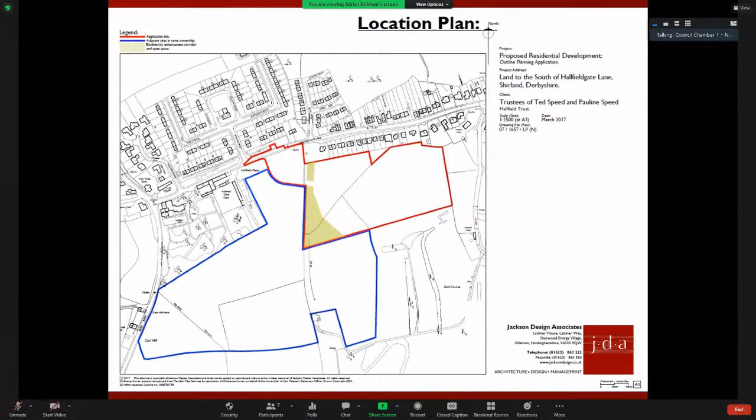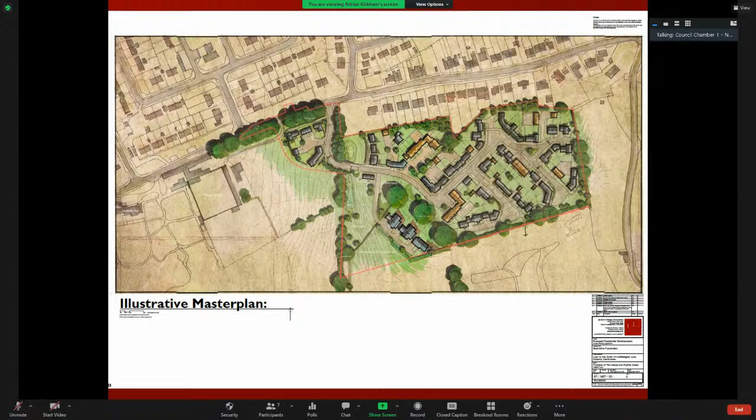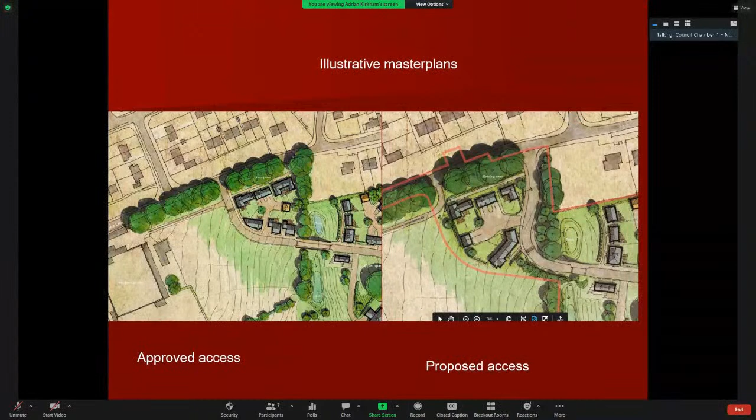This is the red line application site boundary. The conservation area is to the west around Hallfield Gate Farm. This is a submitted illustrative master plan showing the position of the new access running along the western boundary of 43 Hallfieldgate Lane. This is an extract of the illustrative master plan submitted for the extant scheme and the proposed access, showing how the layout of the houses might be located.

This shows the location of the proposed new access along with the visibility splays and its position next to the end tree. These trees are subject to a tree preservation order, and whilst this tree is to be retained, the works are likely to impact it. However, as set out in the report, this is considered a better solution than the extant site access.

To the east, a new footpath is proposed to join up to the existing path on the southern side of Hallfieldgate Lane.

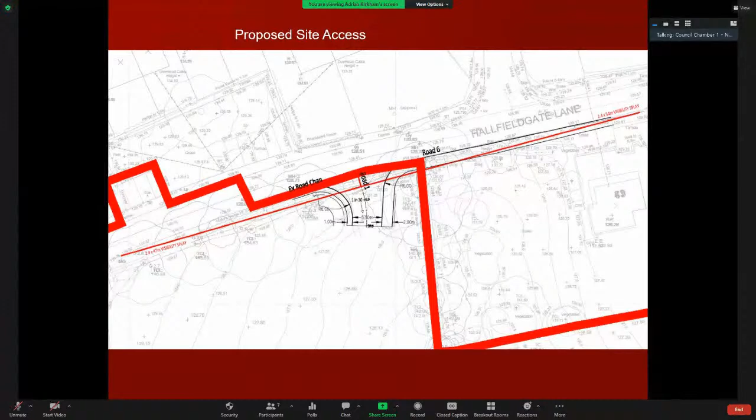This shows the approved site access between two TPO trees. This is the point of the existing access to Hallfield Gate Farm, and as set out in the report, the existing access has caused damage to the two trees either side, and the works to form the approved access would cause further damage to the trees.

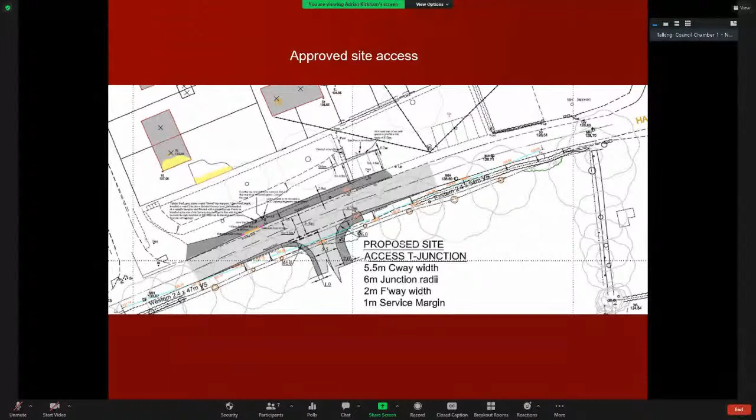This is an illustrative plan showing the cross sections of the internal road. This plan and the following sections show how the access road might be achieved. The red line on the eastern edge of the access road is a proposed retaining wall.

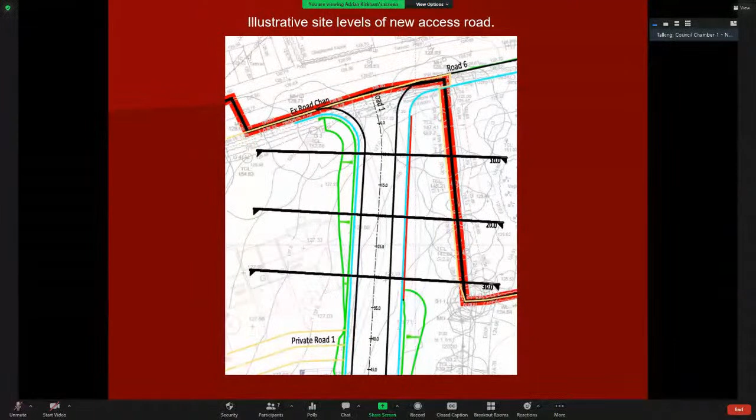This shows the illustrative cross sections. The top one is 10 metres from the site access and the bottom 30 metres. These are illustrative and the final details would form part of the reserved matters.

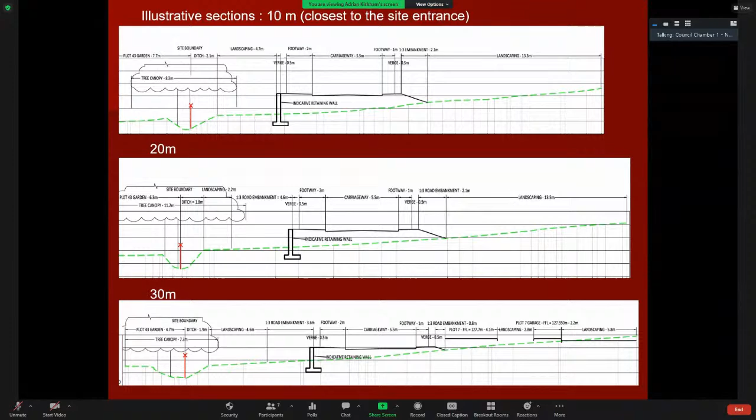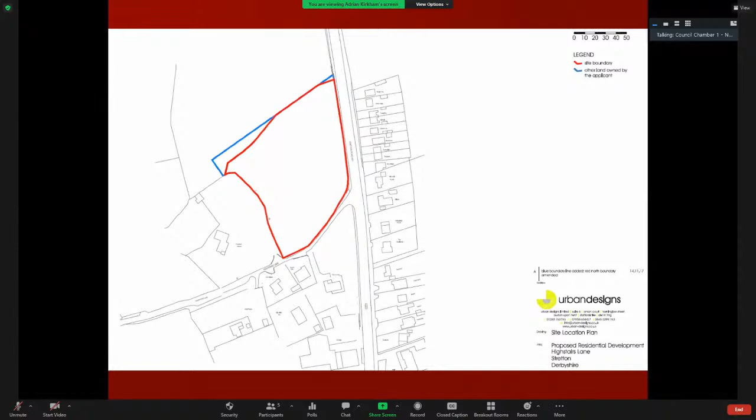So this slide offers a visual comparison between previously—so if you can make out, you've got a comparison of—so if we move forward one slide—so this, no, that's fine. Thank you, so this slide, apologies about that.

Yeah, it must be me—hopefully you can see from the plan up there, though you might not be able to see it from there, Councillor Cooper. But yes, you're right, the garage for plot 6 is right on that line. The advice David gave me is that's the root protection area, and the garage won't go into that area. I think David was advising it's a guide to create the maximum protection for those trees—the garage won't go into that RPA, and we're taking the view that's acceptable. As officers we're also taking measures above and beyond what was previously approved, removing permitted development rights for those properties on that boundary to prevent hard standing, extensions, outbuildings, which we think will give greater protection.

Any other questions? No, thank you. Shall I open the floor for debate? We all understand how to put a motion in if there's no debate.

No debate—I'll put a motion on the table to go with officers' recommendations. Second that, Chair. Okay, we'll go with a vote.

Councillor Armitage. Councillor Cooper. Councillor Elliott, abstain. Councillor Foster, for. Councillor Hancock, for. Councillor Hartshorn, for. Councillor Liggett, abstain. Councillor Jones—excuse me—Councillor Powell. Councillor Rouse, for. And Councillor Roth, for. The motion has passed, Chair.

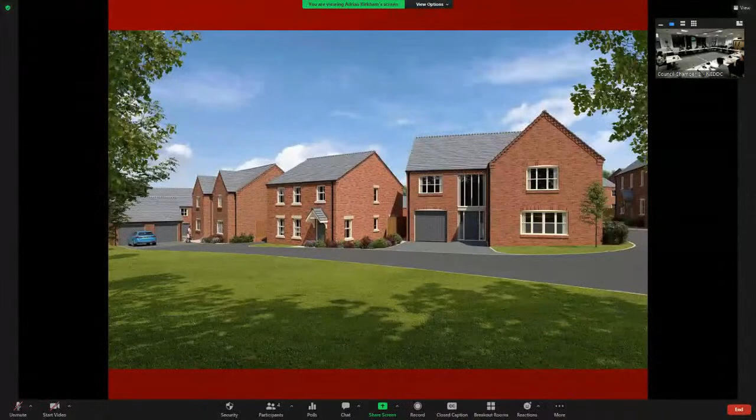This is the second of the applications at Highstairs Lane. This is a section 73 application to vary condition 1, the approved plans of planning approval 17768 RM, to vary the scale and appearance details. The main issues are whether the changes to scale and appearance are acceptable on the site, the surrounding area, residents' privacy and amenity, and the trees to the west of the site.

This is the same slide as before, illustrating the extent of the site in orange and showing the relationship with the surrounding area.

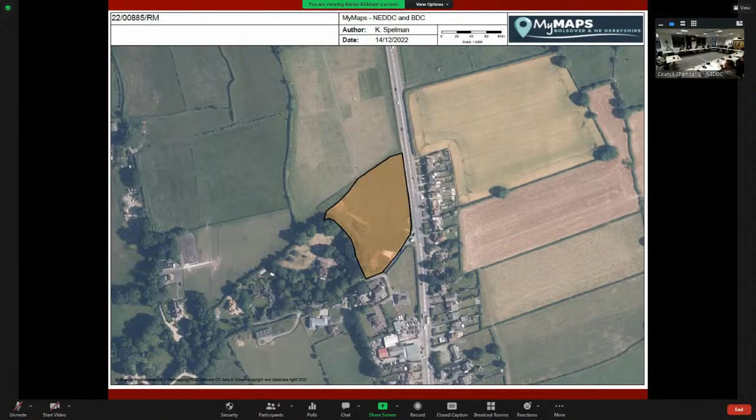This and the next couple of slides have been submitted by the developer and offer an illustrative view of how the development may appear once constructed.

I'll show you a selection of the house types compared to those previously granted. This house type is the Durham, to be used on plots 4 and 5. Materials to be used on this and the scheme in general are red brick to complement the surrounding street scene. The next slide shows the previously approved house type for plots 4 and 5.

This house type is the Barnard and will be constructed on plots 22 to 24. This will be a prominent house type as a terrace when viewed from the A61, in comparison to the previously approved scheme house type in those plots.

This house type, the Waterford, is used at the site entrance on plot 25. In comparison, this is the previously approved house type in that location.

Finally, this is the Bamborough, and it'll be constructed on plot 7, close to the boundary with Prospect House. You'll note the 2 upper floor windows on the side elevation in that top right hand corner. They'll face towards Prospect House, but these can be conditioned to be obscurely glazed and have only high level opening. In comparison, again, to the previously approved house type on plot 7, that only had 1 window in the upper floor.

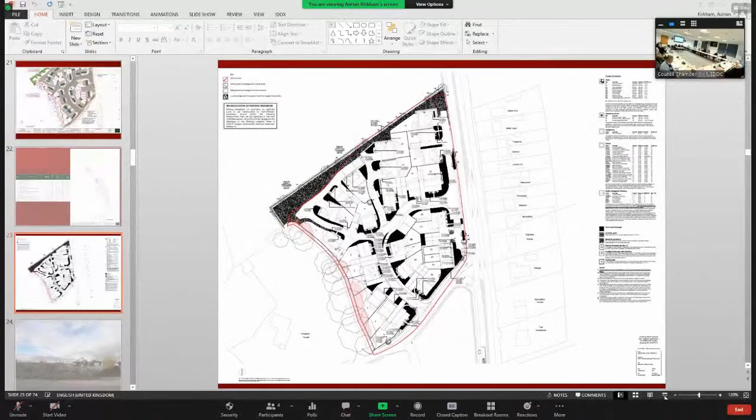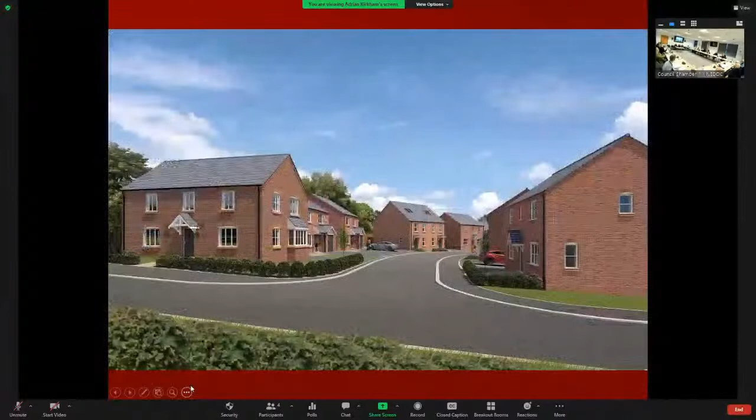So this is the two-story property that is proposed, which has got accommodation over 3 levels. This is the Durham, so this is plots 4, 5, 27, 28, 20 and 21 within the scheme - 6 units. Compared to the previously approved house type, that's what that looked like. So we just flip between - very similar in appearance. On the proposed scheme, the eaves are slightly lower. I think that helps just bring that height down a little bit.

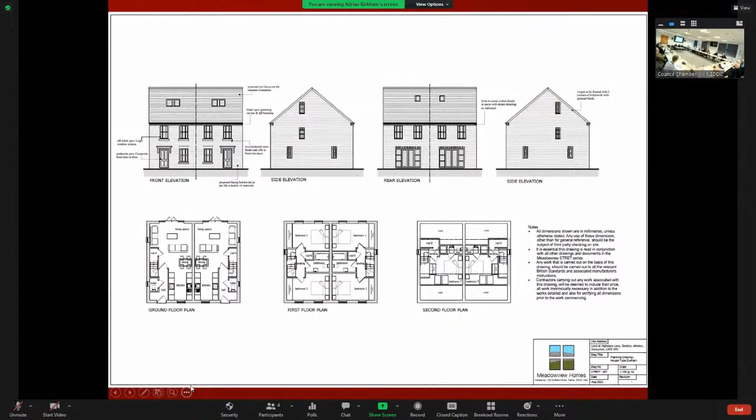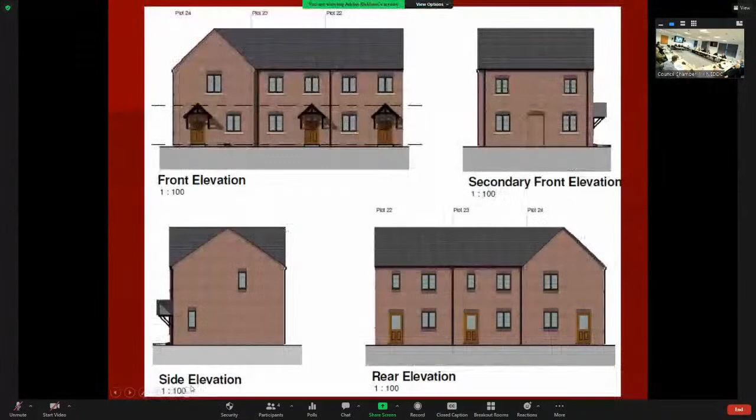So if we move on to the next house type - do you want me to go through all of these? Yeah. So this is the row of terrace, plots 22 to 24. It sits on the corner of Highstairs, so it's very, very prominent in the scheme. This is what's proposed compared to what was previously approved on the next slide. So it could be argued that the proposed house type has actually got a little bit more character to it.

And then the next house type - I think this is one at the site entrance, plot 25. So this will front right onto the entrance and have a side on to Highstairs Lane. In comparison to the previously approved house type, it's not vastly different. So if we move to the next house type.

This one's plot 7. This is the one that has quite a close interaction with the boundary on the west. In comparison to the previous approved house type - yes, I think we might get widths and lengths a bit of cross-reference here. It is a little bit longer, so as you view from Prospect House, it is a little bit wider. I've worked out that the massing on that boundary is probably only about 10% difference. Hopefully that helps, Councillor Hancock.

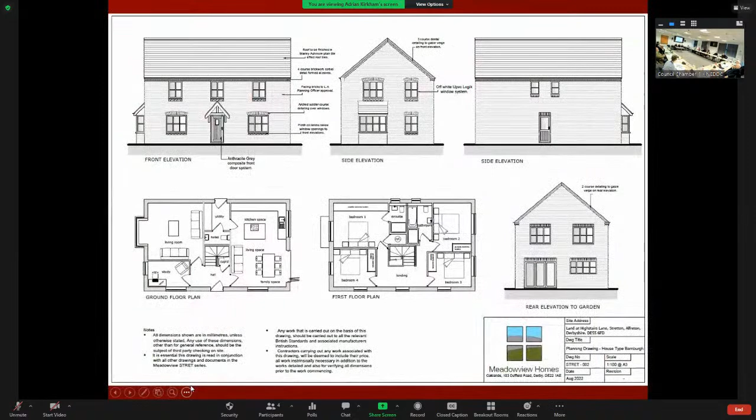Is that okay? Okay. Any other questions? Any other opening for debate? No, I'll move it for a motion then - that we go for officers' recommendations. Thank you. Second that, Chair. Thank you.

Off we go for roll call. Thank you, Chair. Councillor Armitage. Councillor Cooper. Councillor Elliott. Councillor Foster: For. Councillor Hancock: Against. Councillor Hartshorn: For. Councillor Liggett: Abstain. Councillor Jones: Abstain. Councillor Powell. Councillor Rouse: For. And Councillor Rough: For.

So I make it 5 for the motion, 3 against and 3 abstained. The motion has passed, Chair. Thank you. Okay, thank you all very much.

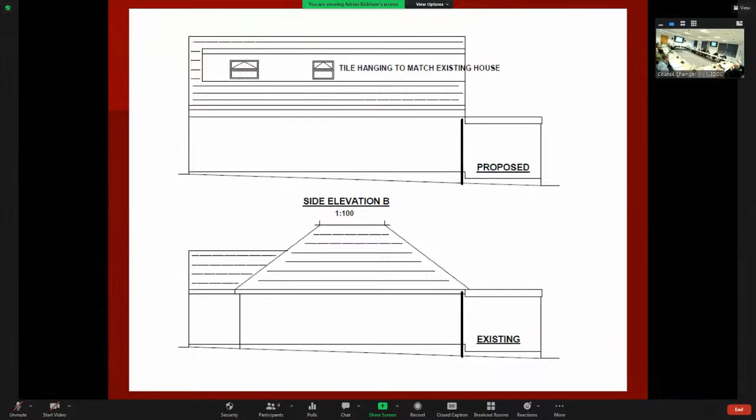And the other question was around the overlooking of Holmesdale Close. So that first one, please.

In terms of the first point, I think this is the issue Councillor Foster's mentioning—if you look from there, with the eaves being raised by the 0.7 and the gable being formed, the box dormer viewed on both side elevations would be out, so you couldn't see the apex of the roof.

That's a consideration you will need to take into account. But from an officer point of view, we will look at the impact on the amenity of the neighbours. So set aside what it looks like for a second, because you'll need to consider that as well.

In terms of the impact on the neighbours, because the rear face of the extension is in line with the properties either side, the impact on the amenity of those properties, particularly those at Bents Crescent, whose outlook is towards the south, wouldn't in our opinion be overridingly detrimental. I'm not saying it doesn't have an impact, but you have to assess if that impact is harmful. In terms of the bulk of that box dormer, yes, it will have an impact on the neighbour—there's no doubt about that. But whether it's harmful, our view as officers is that it wouldn't be overridingly harmful.

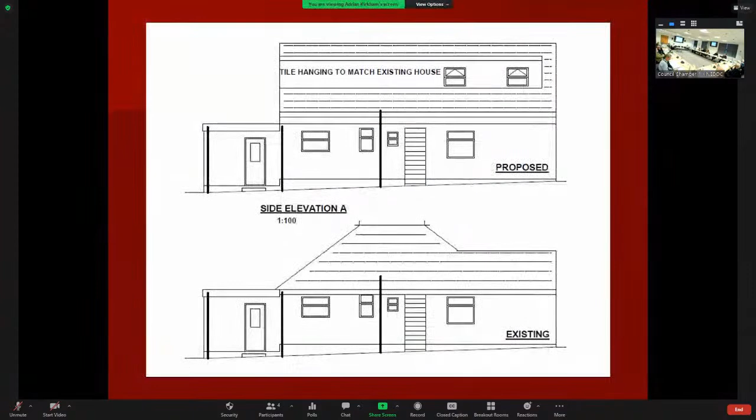And the next question was around the 28 metres, which you did provide some clarity on at the beginning of this presentation. The 28 metres is from the actual Juliet balcony itself to the rear of the properties at Holmesdale Close. That's 28 metres, but there are some properties there with extensions. So what would be the distance to the rear of those extensions, roughly?

And we weighed that in terms of successful places, 21 metres you would normally look for. But then, of course, in this instance, you also got to take into account the topographical difference - the difference in the levels between the application property and Holmesdale Close.

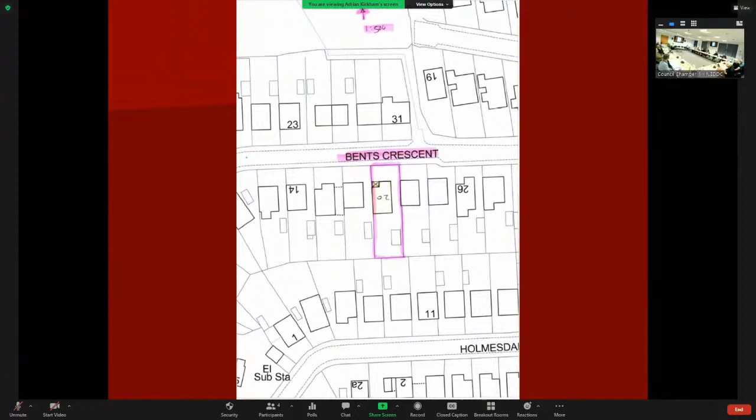I wasn't going to come onto that until the actual debate, the topography of it. How it does look when you stood there, and you can see straight down. It faces goes straight in the rear bedroom windows. Absolutely, but I was going to come on to that in the debate.

Photograph, Chair, was sought to demonstrate that, although that photograph is taken from ground level at the application property, it's not taken from where the Juliet balcony would be. That would be higher. Just to be fair.

Before you take the pictures away, Adrian, can you go back to one where it shows you the, dare I say it, hideous extension that's next door?

So how does that affect the privacy issue of looking down onto the other bungalows? Are there windows at the back of that extension? Do we know? In that box dormer, yeah, I believe there are windows facing forwards onto Bents Crescent. There's a side window that you can see, and there's also a window facing towards Holmesdale Close as well.

So with the proposed extension for the applicant, is it the same height as that box or less? I think that's difficult for me to answer because I've not got the plans for that in front of me. It could be very similar, it might be slightly above it. It's hard for me to say. And the proposed extension will be slightly further back in the roof slope, won't it?

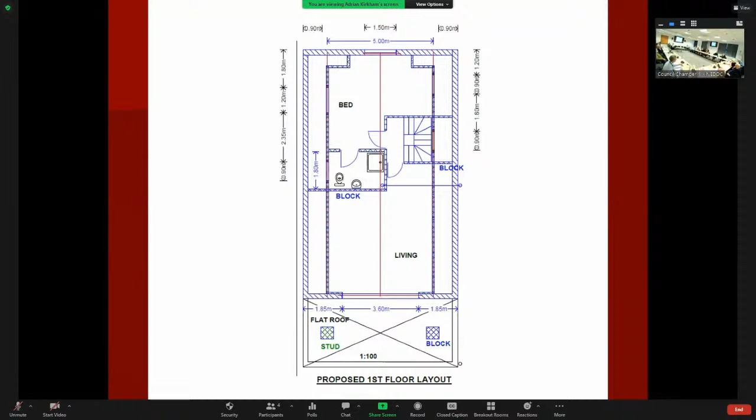But I think what we're trying to be clear is that the first floor extension won't go any further than where you can see the downpipe. So what we've taken a view on as officers is that this isn't significantly harmful in privacy and amenity terms. The requirement is 21 metres, and we appreciate the topographical changes. But there's also the guidance in successful places requiring 10.5 metres from the upper floor window to the rear boundary, and this comfortably meets that.

I believe it's probably about 12 metres. So yes, there will be overlooking, but is that significantly harmful? I think that's what we have to weigh up here.

Any other questions for the officer, Councillor Cooper?

It may not be a question, but I would have to say that from a design point of view, this application looks far more appealing than the one 2 doors away. I think we can all agree with that one. Because that's actually right next door, isn't it? Yeah, okay.

Okay, are there any further questions for the officers? No? Okay, the floor is open for debate. There is none? Oh, Councillor Foster.